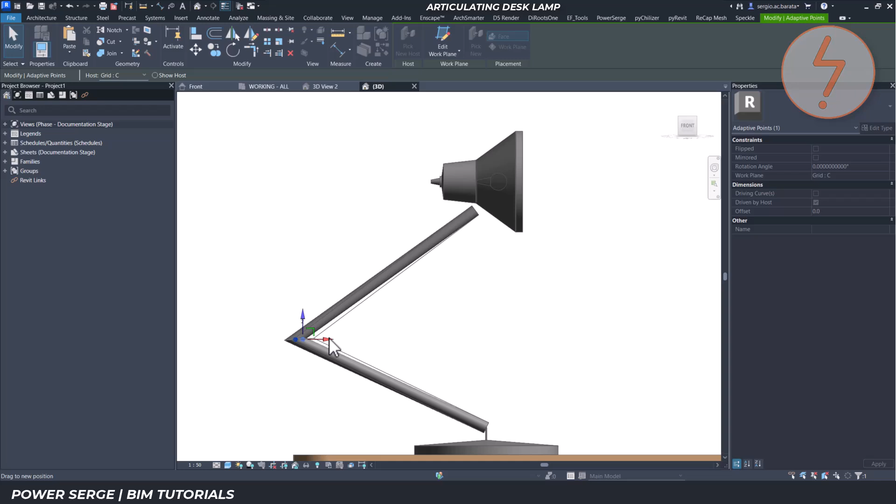Let's take a look at how to build this articulating desk lamp in Revit. This family has two articulation points, one at the elbow where the two arms meet and another at the top of the second arm, plus a tilt parameter that controls the lamp head.

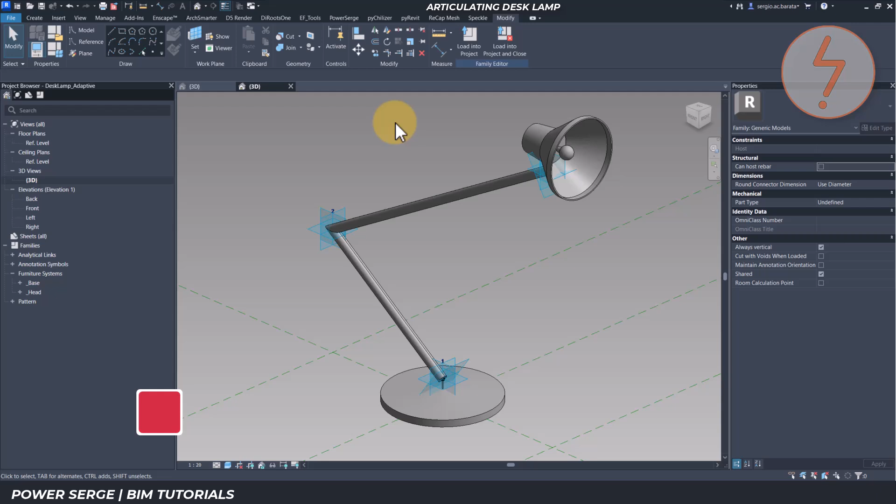As I open the family, the first thing to point out is that it's an adaptive family, which uses its own adaptive template. You'll see in wireframe that I've placed adaptive points and drawn reference lines to control the flexing.

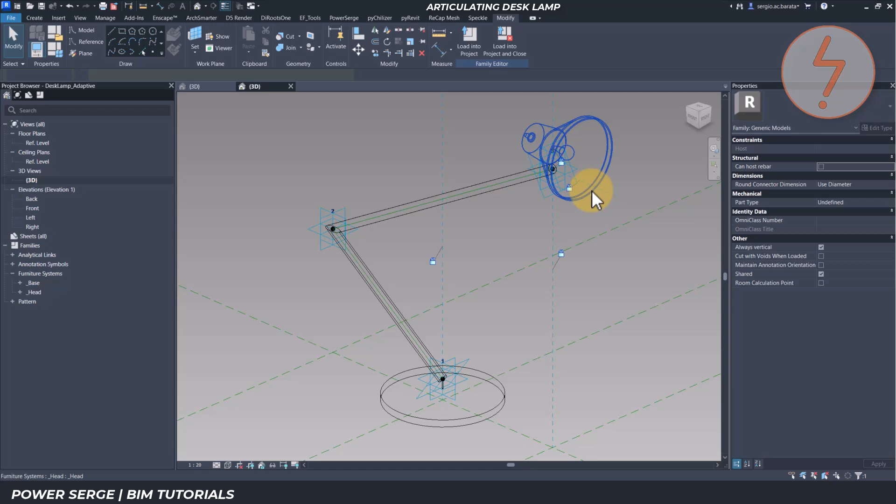There are also two nested families here, the base and the lamp head. For now, I've hidden those because they're added back in at the end. So let me walk you through how this came together. I started in elevation, placing 3 adaptive points. One at the base, one for the elbow, and one at the top for the lamp head.

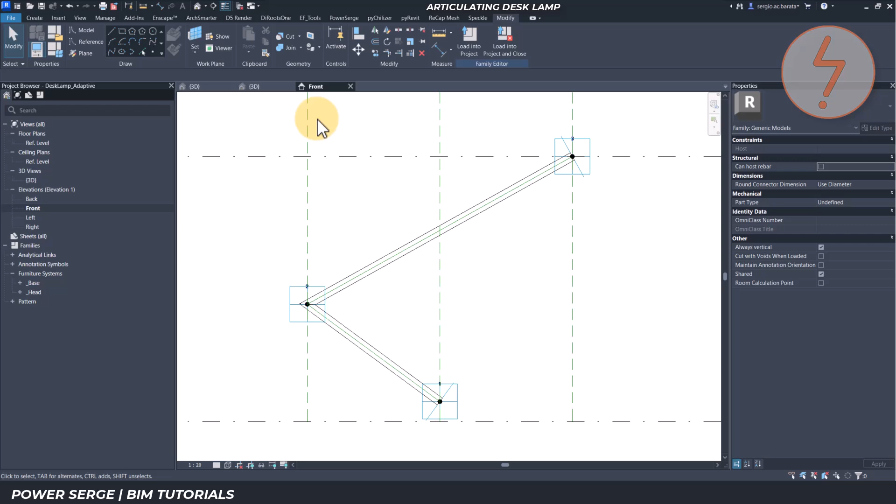Then, in 3D view, I sketched the reference lines. To do that, I set the elevation as the work plane, chose the reference line tool, turned on 3D snapping and connected the 3 points. If you flex the points, you'll see the elbow joint move exactly as intended.

Next came the arm profiles. At the midpoint of the lower reference line, I placed a point element, then set its work plane so that it was perpendicular to the reference line. Using the circle tool, I sketched an 8mm radius circle at that point.

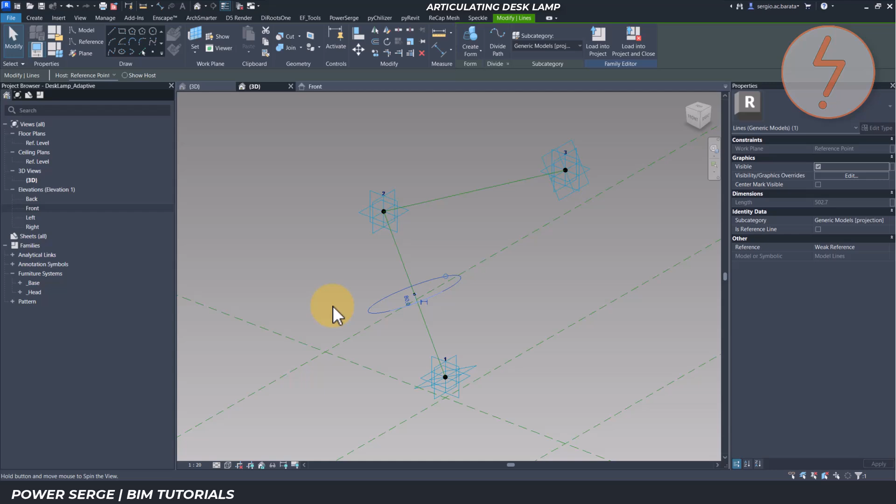Selecting the circle and the reference line together, I created a form, choosing solid, that extrudes the profile along the path to form both arms. To make the geometry clearer, I switch the display to shaded so the solids stand out.

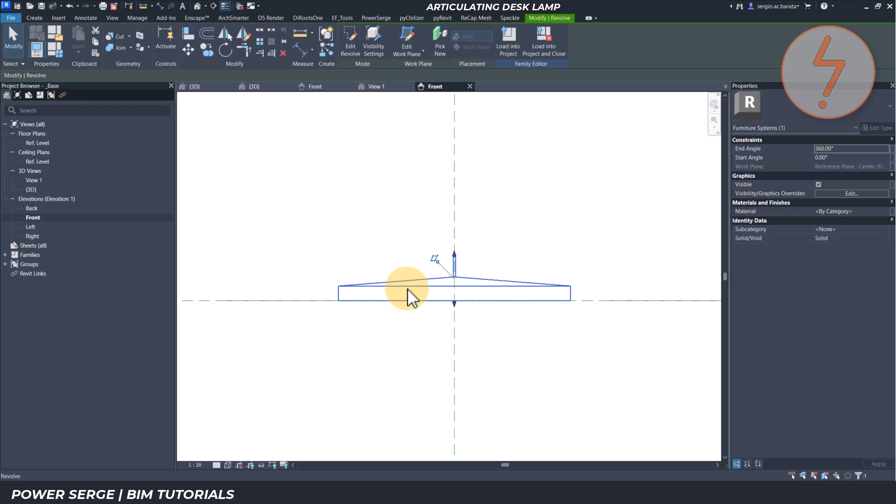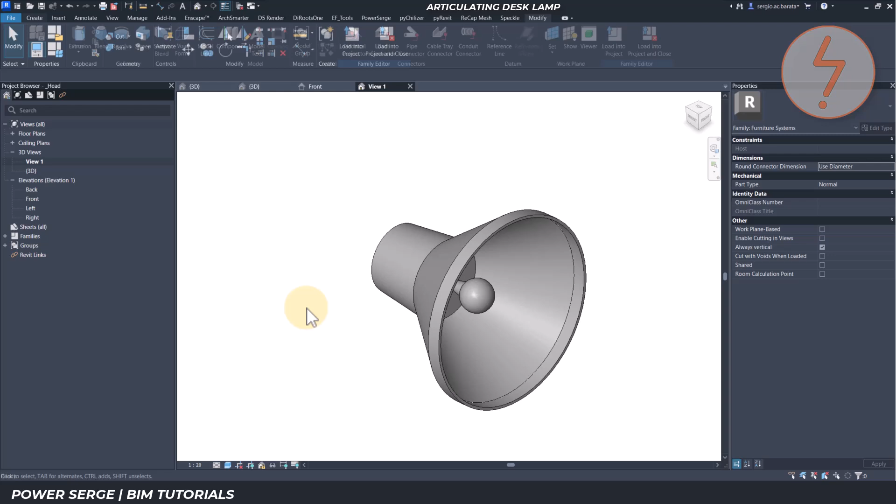Now for the nested families. The base is very simple, just a revolve extrusion drawn in the front elevation. Now the lamp head is more complex because it's parametric. I build this with another revolve, but it's locked to a reference plane that controls the tilt.

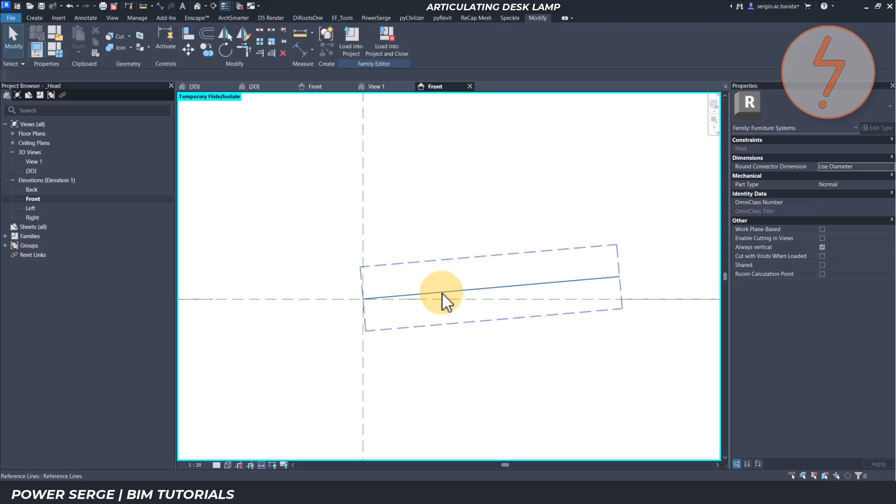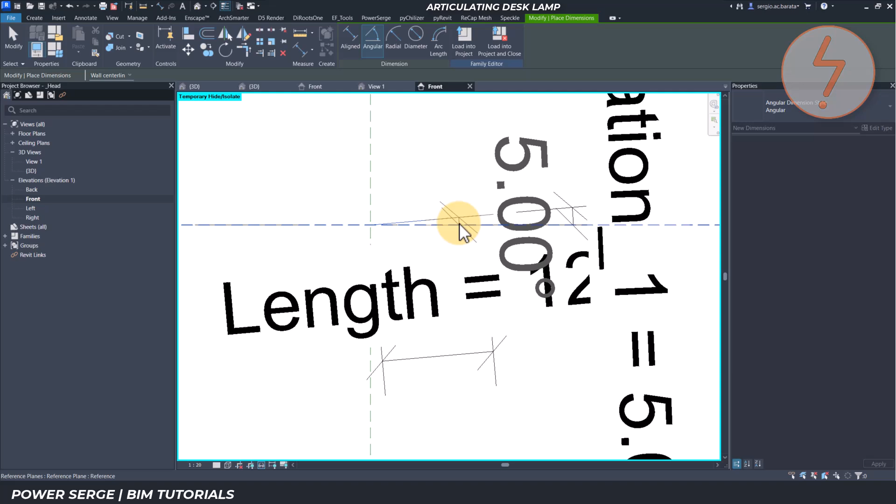Let me hide a few elements to focus in on the reference line. The left endpoint of that reference line is aligned and locked to the vertical center plane. Then I add an angular dimension to create the tilt parameter. As I click the example I prepared earlier, you'll notice that it's parametric. This controls the tilt angle.

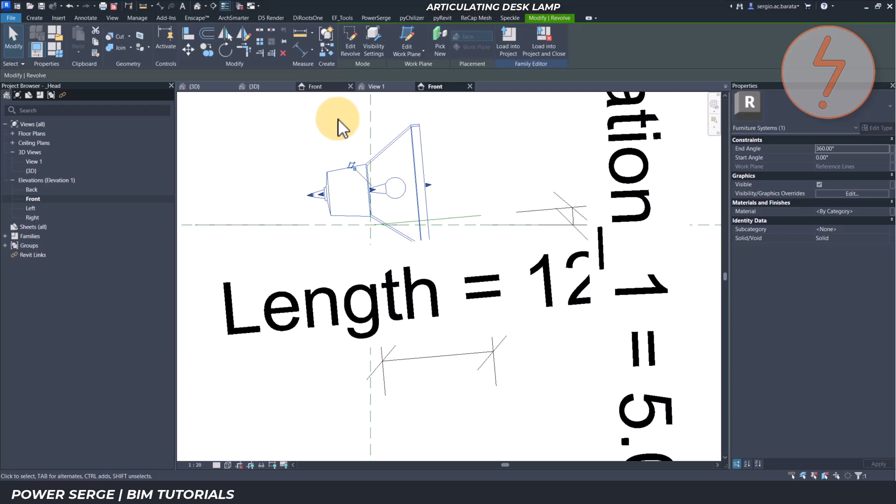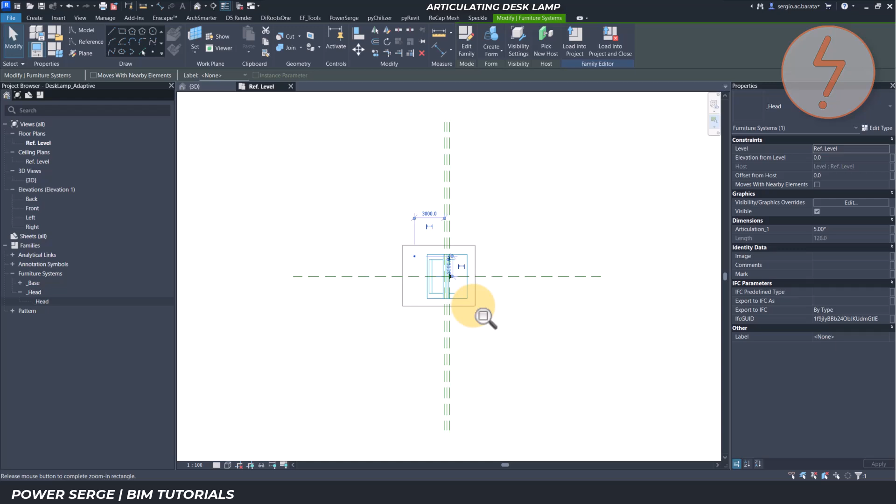We also have another revolve solid here, and it's locked to a reference line that drives the tilt. With the geometry done and flexing, I can load this lamp head family into the parent adaptive family. Back in the parent family, I'll start in plan and place one instance of the lamp head. You can see it appear over on the upper left side.

Using the align command, I'll select the horizontal plane and then select the corresponding plane in the nested component and then lock it down. Now I'll move it closer to the articulating arms so that I can zoom in closer. It still has the default 5-degree slope from when I flexed it before inserting it here, so I'll reset to 0 because it makes alignment easier.

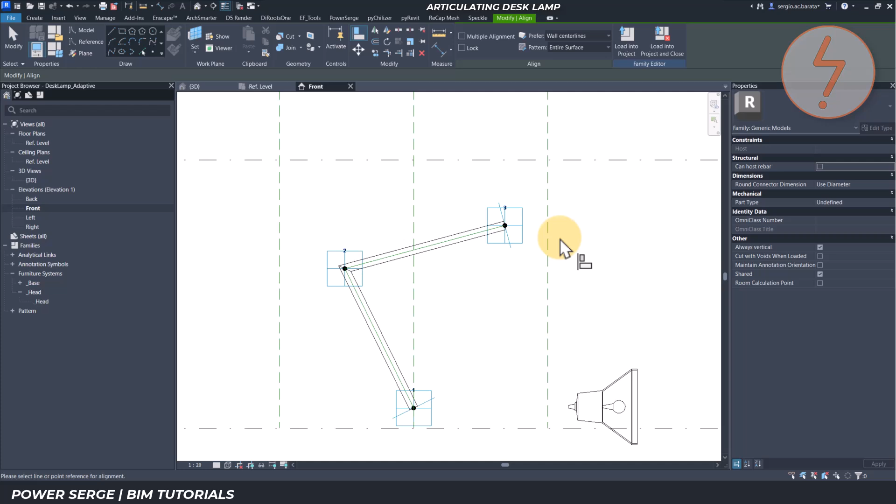Using the align command, I select the adaptive point first, and then I select the center plane of the nested head and I lock it. I repeat this for the horizontal plane, remembering to pick the adaptive point first. Use tab to be sure that you're grabbing the right reference plane and not faces.

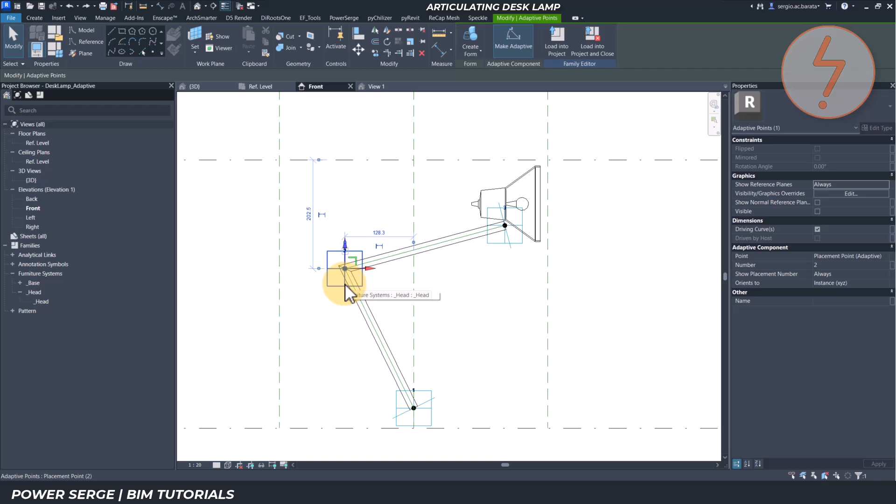With those locked, I'll flex to test. I nudge the elbow point and the upper arms follow. I move the top adaptive point and the head tracks correctly. Finally, I flex the tilt parameter through its range. Rotation is smooth and centered on the axis.

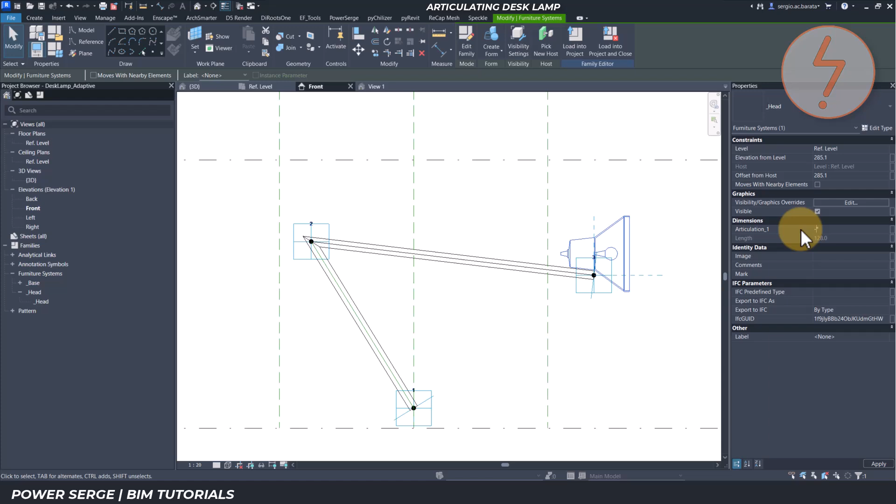And I know you thought I'd forgotten. If you have stayed with me for this long, here's the final step, connecting the base. It's actually very similar to the lamp head with the align command active. First select the adaptive point and then select the vertical reference plane of the nested base family and lock it.

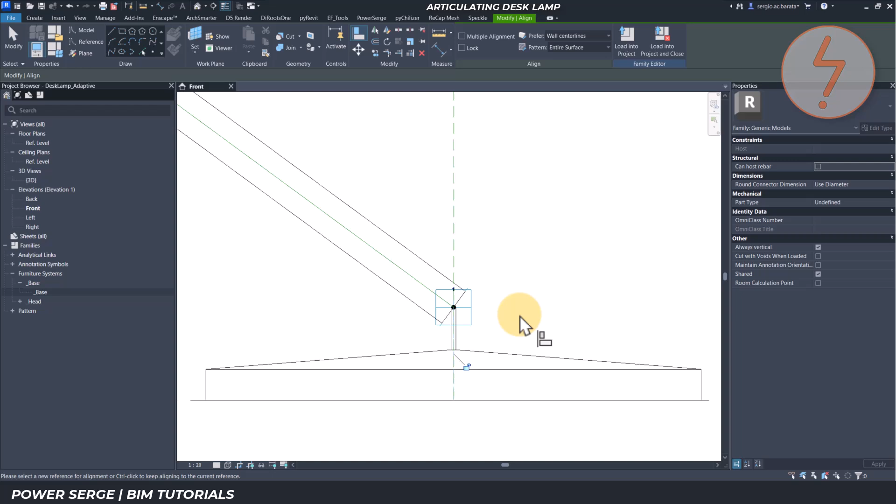Next, align in the horizontal direction. Select the adaptive point again, then tab through until you can pick the top of the base family and lock that down as well. You'll know you have it right when you see 2 padlock symbols appear. Interestingly, this part of the family is not meant to flex.

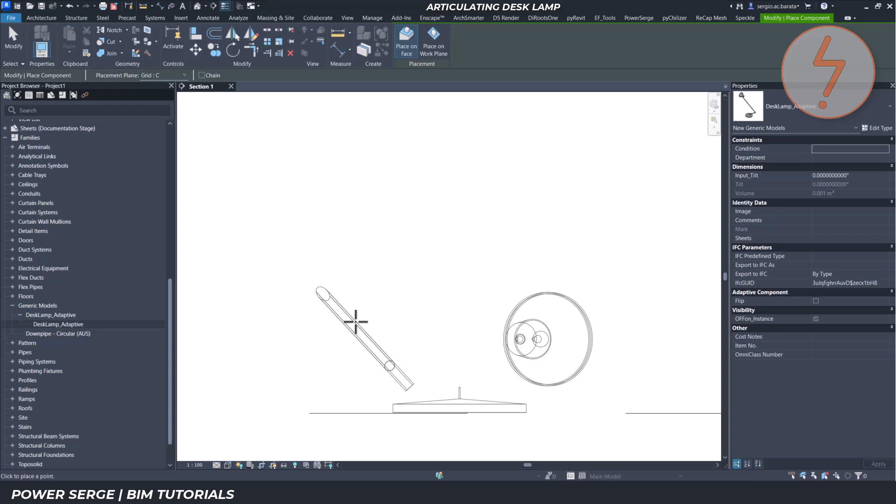Let's now place this in a project. It's fixed in place, acting as the anchor for the rest of the lamp. So now we have it, 2 articulated arms, a tilting lamp head and a fixed base, all working together in one adaptive family.